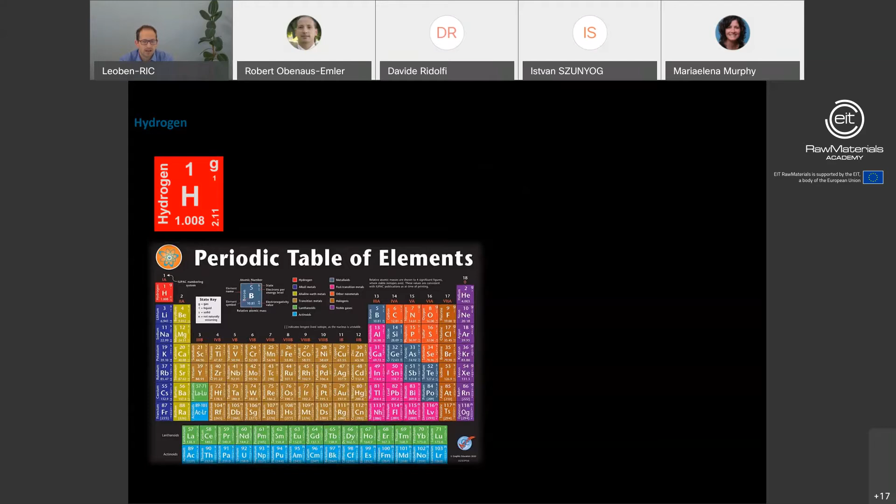I said hydrogen, so let's look at hydrogen first. Hydrogen is one of the elements, of course, and I put the periodic table of elements here on the screen. And hydrogen is there in the top left corner. It is therefore the lightest element that we know. It is the most abundant element in the universe, so almost everything is made of hydrogen. Only a tiny little bit is not hydrogen.

It is the major constituent of our sun, where at the moment around 75% of all the mass in the sun is hydrogen. The rest has been converted to helium by fusion, and that's also a really cool process because it produces energy, and this energy we can see as light. And that's the main reason why we're here today, why you are online and I'm online, and why we all live as animals and human beings here on the Earth.

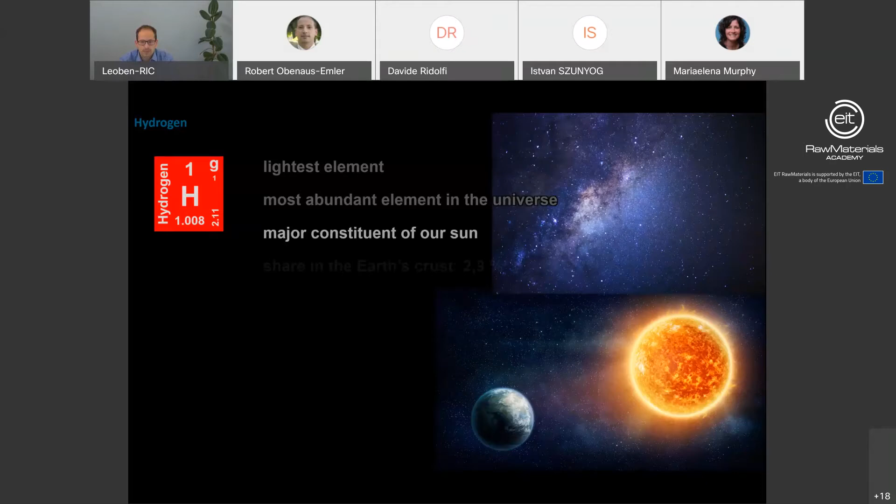So on the Earth hydrogen is also available, but mainly in the crust only. And here an overall share of around 2.9% can be attributed to hydrogen. Here on the Earth, in the crust, we have it found mostly in compounds. So not in its pure form, just in compounds. And the most well-known is, of course, water.

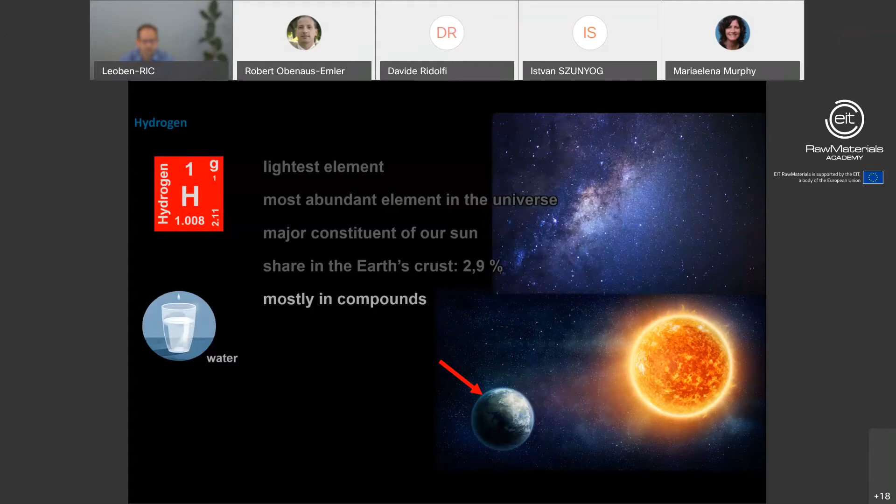You all know that. There's water everywhere around you, probably. You're drinking it, I'm drinking it. There's also seawater, so a lot of hydrogen is in water. There are other substances that contain hydrogen, for example, oil and gas, which contain a lot of hydrogen. And then, of course, a lot of hydrogen is also found in various minerals.

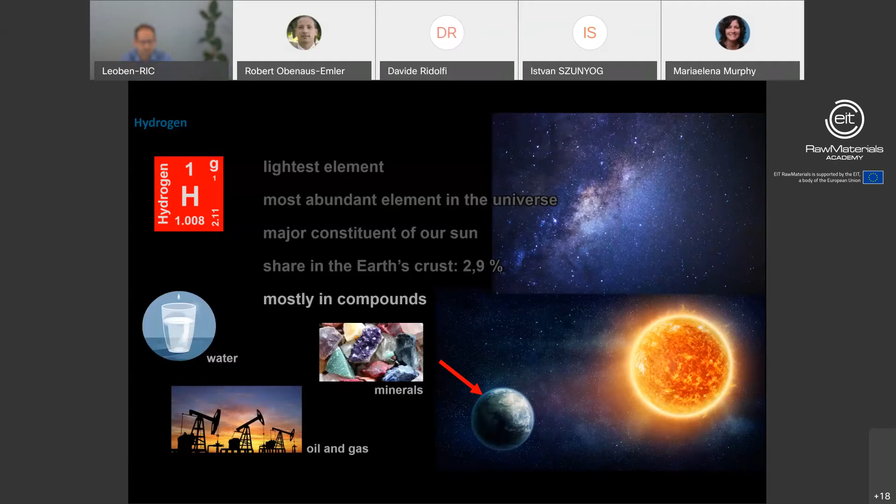So hydrogen is not found in its pure form normally, where it would be a colorless and odorless gas, H2, just two atoms of hydrogen bonded together. But that's actually the one that we are after, because that one is also an energy source, and it has a calorific value of around 33 kilowatt hours per kilogram. So to compare that with, for example, natural gas, this is 3 times as much as natural gas.

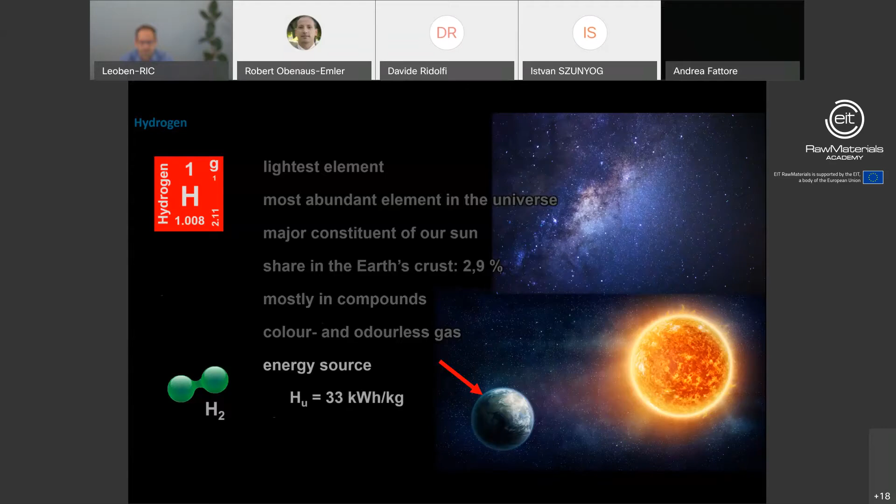So today, we are already using hydrogen, and we're producing it. So I've put here some rough numbers, partly estimated as a projection for the current year 2020. So overall, globally, we produce roughly 120 million tons of hydrogen per year. In the European Union, 12 to 13 million tons. And well, we are from Austria here. So in Austria, roughly 0.15 million tons. That is not much, but it's still significant.

So let's have a look at what we really use it for at the moment. And we use it for these 4 main things. It is the production of fertilizers, so here mainly ammonia. It's hydrotreating of petrol, so to produce the fuels that you need to drive your cars, we need hydrogen. We also use it for the production of methanol and also partly for some metallurgical processes.

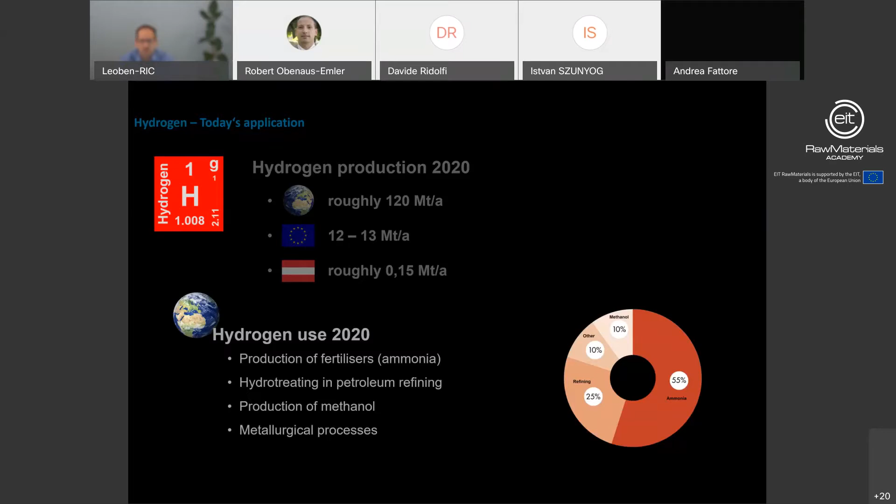As you see here in the bottom right on this graph, most of the hydrogen is used for ammonia. So this is the dark red color. The next biggest part is used for hydrotreating in the petroleum industry, and then a bit for the others. So let's have a look at how we can produce hydrogen.

40% of this overall amount of hydrogen that we produce is actually a byproduct of other industrial processes. And this hydrogen is not available because it's being used there directly within the process. So, for example, it will be converted to energy that fuels basically the process itself.

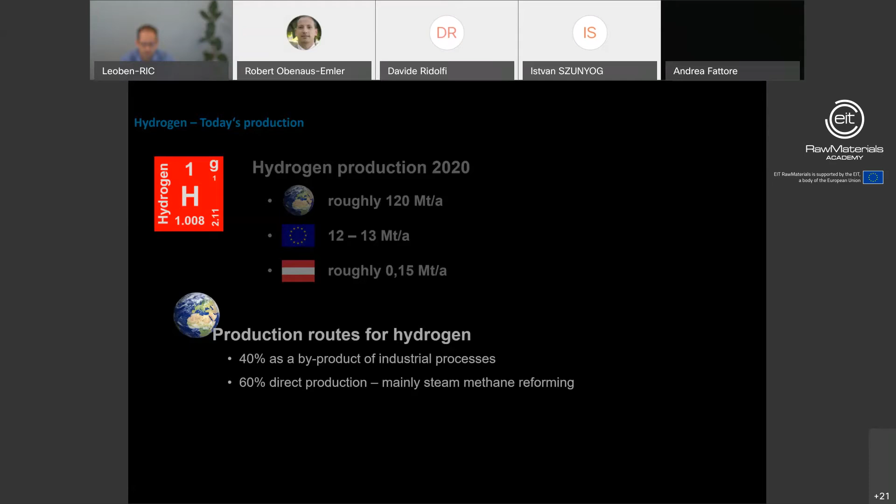The other 60% are the ones that we really directly produce. That's the hydrogen we are after, that we want to use for those applications. And there is a main production process for hydrogen currently, and that is steam methane reforming. And steam methane reforming relies mostly on fossil fuels.

Well, and if you add it up and do the maths, then you will find out that around 12 kilograms of CO2 are emitted for each kilogram of hydrogen that you produce by steam methane reforming.

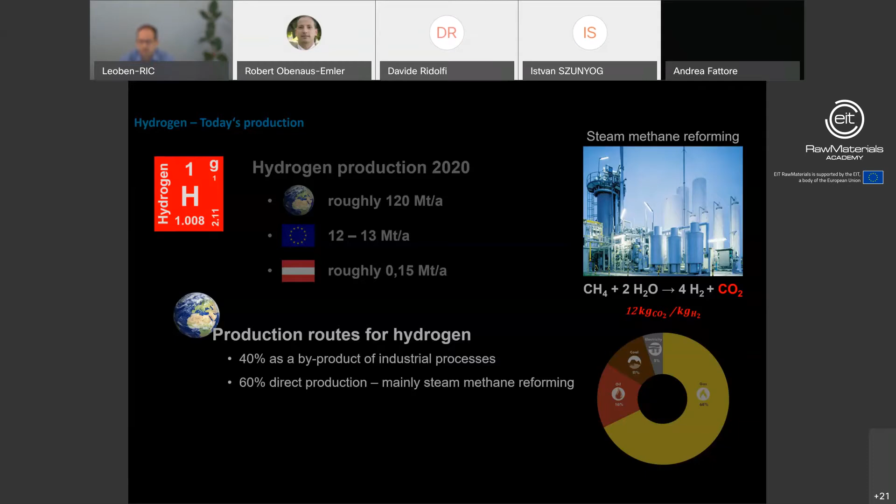So you have heard about hydrogen a lot, I think, and you have picked up that there might be applications here and something to do there. And let's have a look at the hype. Why would it be so important to have hydrogen? What are actually applications that are of interest? Well, I said it's an energy source. So it has a high calorific value, and that, of course, can be used to produce heat and also heat industrial processes, houses, anything you can think of. That would be one major application.

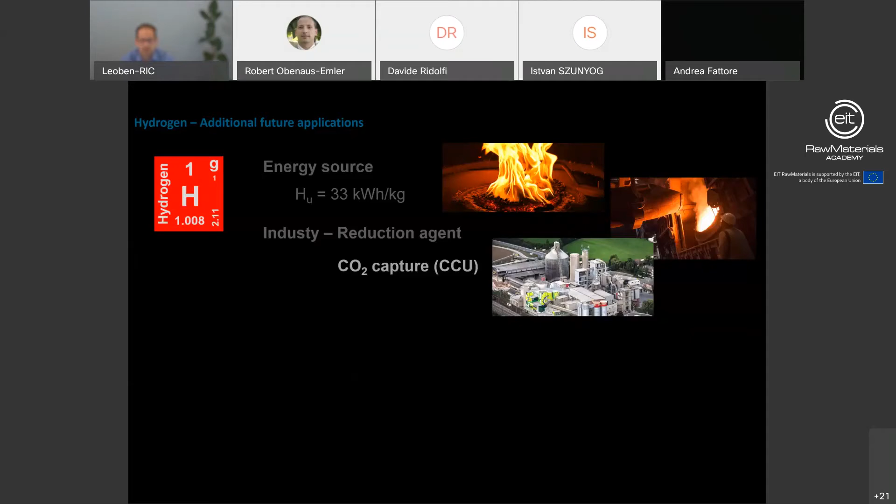Another one would be that you can use it in the industry as a reduction agent to produce steel, for example. Steel is one of the main emitters of CO2 at the moment. You can also use hydrogen to capture CO2 from other processes. Here is an example of a cement plant. So I was talking about capturing CO2, and here's an example of cement.

Cement produces around 1 ton of CO2, maybe a little bit less, per ton of cement. And most of that CO2, more than half of that, is not from fossil fuels. It's not from bringing the energy to the process. It is from the raw material. It is from limestone. And that we can't get rid of, right? Even though we could heat and produce cement without fossil fuels, still the CO2 of the raw material limestone will be emitted. And hydrogen can capture that and produce something cool out of it.

For example, it can make synthetic fuels. And synthetic fuels are something we will still need in the future. Here's an example of an airplane. Airplanes will not be able to fly on battery power or probably not even hydrogen power. They will really need synthetic fuels to still be in operation.

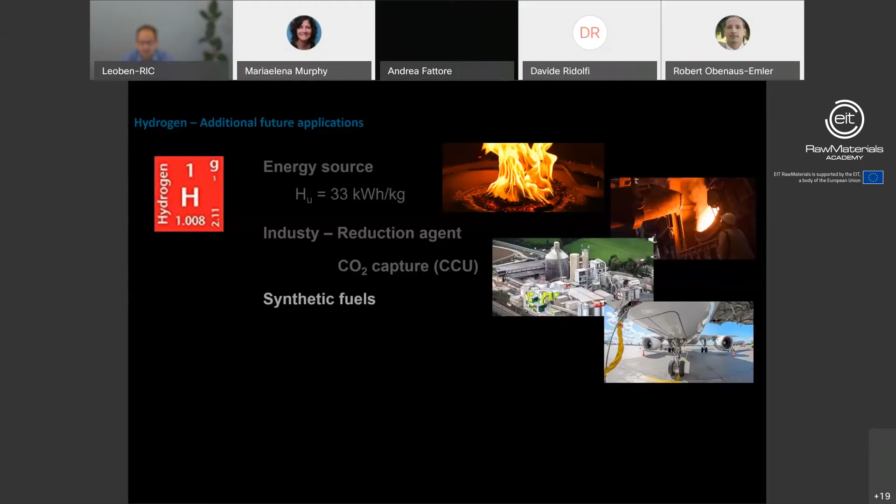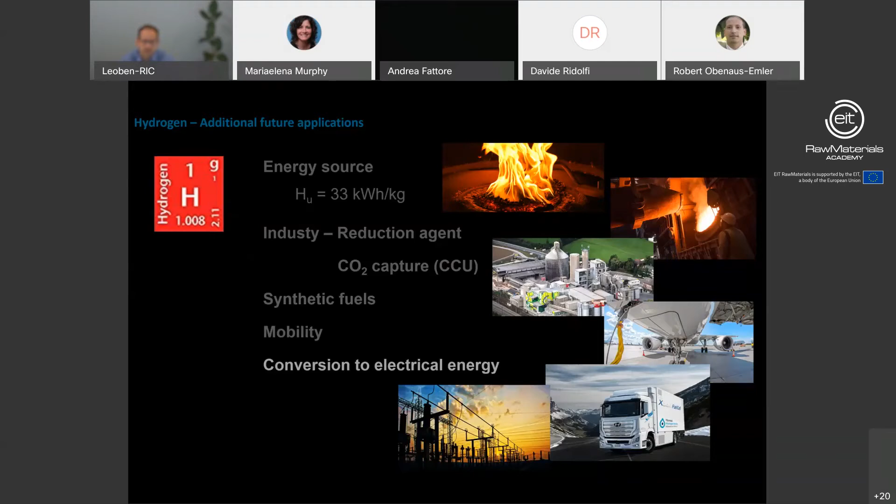I mentioned mobility already, and hydrogen can play a major role in mobility, especially for heavy vehicles, for trucks, and intercontinental traffic of big and heavy loads. Also, hydrogen can be converted back to electrical energy, and that can be used for everything else. So if you use electric energy to produce hydrogen and then convert it back to energy, that will be like the battery for electricity. It will be hydrogen to store electrical energy in another form. So that's a lot of cool applications.

But what will be the demand? A lot of people think about where to use it and what to do with it. And here is a little forecast of how much that could be. So at the moment, this is what we're using, around 8 to 10 exajoules. This is now energy, but that's the amount I mentioned before. It will increase roughly tenfold until 2050. So a lot more hydrogen will be needed. And obviously we cannot produce it by steam methane reforming, because we are really producing a lot of CO2 with it.

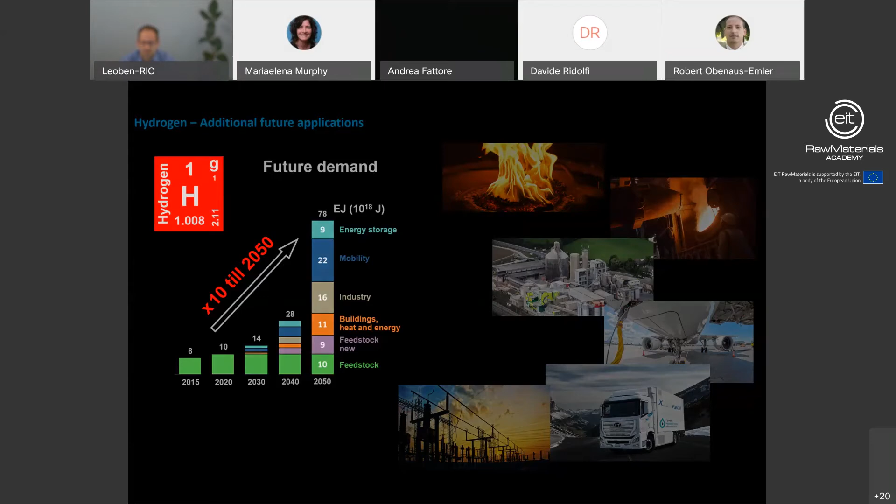So how could we possibly produce it? And I'm sure that you remember from the beginning that hydrogen comes also in the form of water, liquid H2O. And that can be split into its components, hydrogen and oxygen. And actually that process is called electrolysis. I think most of you have seen this somewhere in a school experiment or have done it by themselves. It's pretty simple and it does the job.

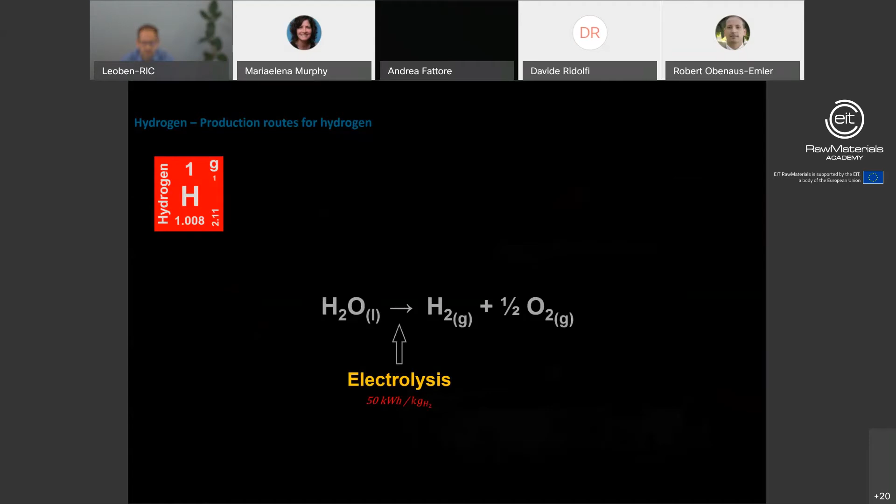However, to do it, because hydrogen in the form of water has such a strong bond, it needs around 50 kilowatt hours per kilogram of hydrogen to produce that reaction or to facilitate that reaction. And depending on where this electrical energy comes from, that can have a major contribution to CO2 emissions. So that could be something around 30 kilograms of CO2 per kilogram of hydrogen if you take the power directly from the next coal power plant.

It could be low if you really go to renewable energy. So that means in the end you need renewable energy for electrolysis, otherwise you will just produce a lot of CO2 again for producing your hydrogen, which is not what we want. But let's have a look here. Well, what can we do? I said it's an energy source.

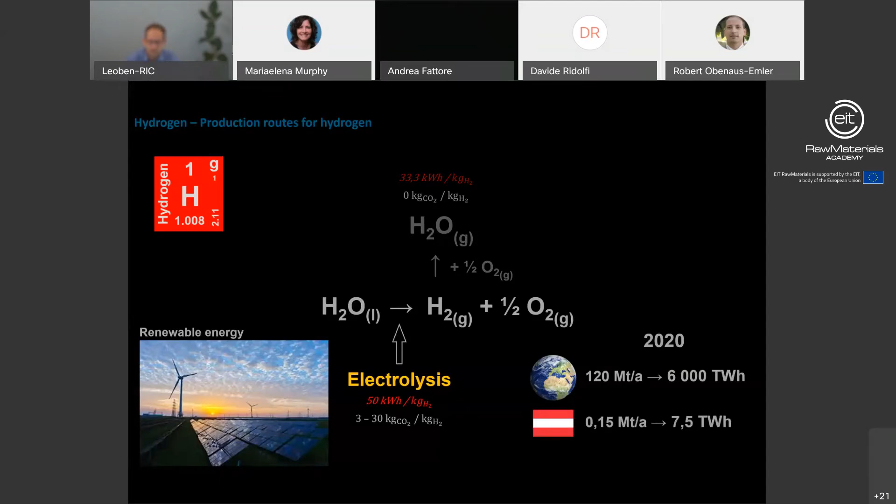We would need actually 75 terawatt hours of electric power to produce the hydrogen. And that would be almost exactly the amount of energy that the whole nation needs right now in a year, without producing almost any hydrogen by electrolysis.

Anyway, that means we would need so much more renewable energy installed until 2050 so that we can double our energy consumption. And that's quite a lot of energy that we need, and that's quite a lot of money and quite a lot of infrastructure. And the question is, is that possible to do? Well, I don't have the answer right now. We can come back in 30 years and check.

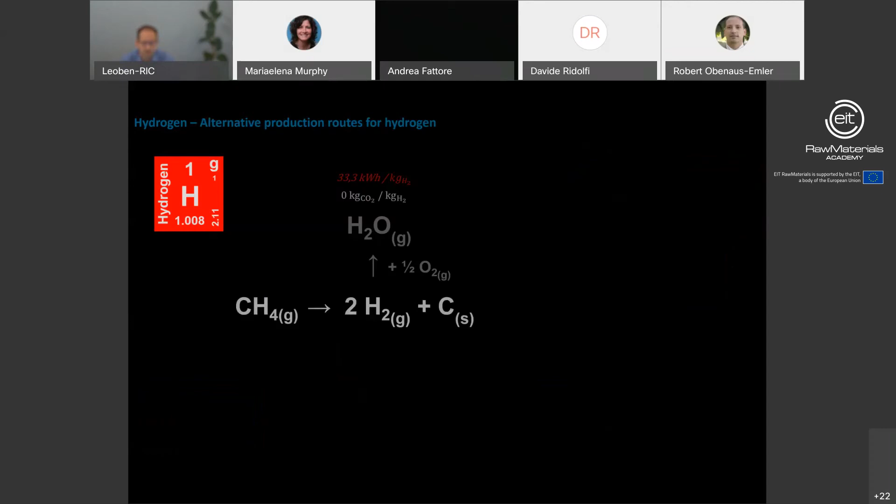But is there anything else that we could do? Is there another source? Well, if you remember from the beginning, it was water, and then we had also the fossil fuels. And if you just look at methane, CH4, so natural gas, then you could actually also convert natural gas into hydrogen and carbon. This process is called pyrolysis. And it only needs around 1/4 of the energy per kilogram of hydrogen than the electrolysis. So that's a big benefit.

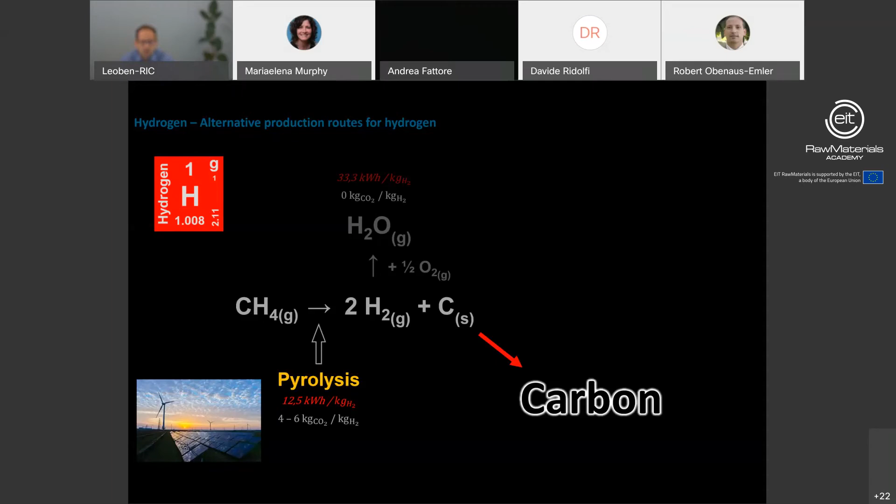Also, again, if you use renewable energies for that, you will end up roughly with 4 to 6 kilograms of CO2 for each kilogram of hydrogen that you produce. And additionally, you get carbon, solid carbon, no CO2, nothing like that, solid carbon. And solid carbon is also a very important element that we need already now a lot for batteries, for example, and other things, but also for many more applications possible for the future. And so I think we better look at that now.

But before, let's check the figures again. If we produce 120 million tons of hydrogen a year, and we would do this only by pyrolysis from methane, we would end up with around 360 million tons of carbon. Well, that's quite a bit, and we will see in a bit that this is a lot.

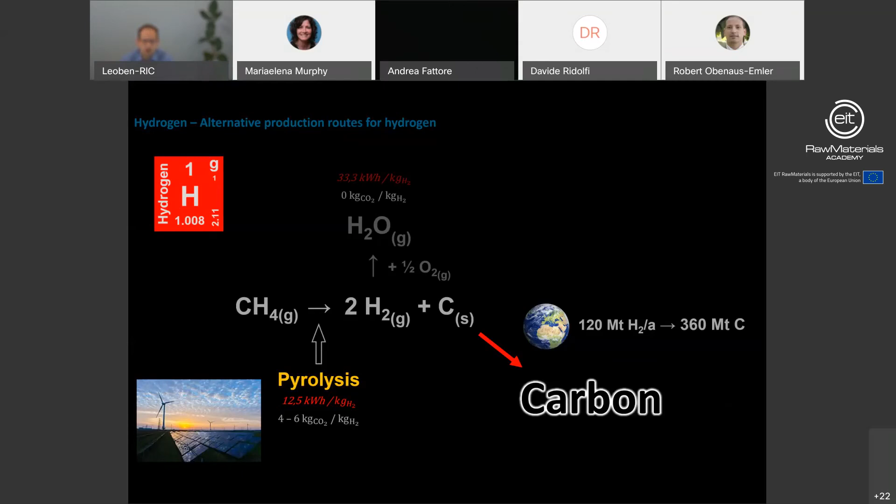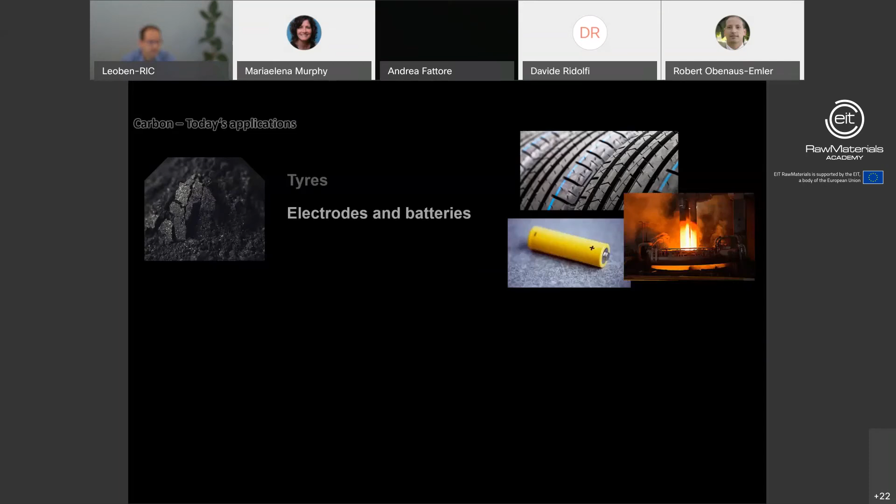So to compare it, let's have a look at what carbon is used for today. So here's a picture of graphite, which is also called the black gold. And it's got some applications, of course, already that you all are familiar with, or most of them, I think. Well, if you drive a car, your car has tires, and tires need carbon. Also, other rubber products need carbon, of course. It's used in electrodes and batteries. So to produce steel in an electric steel plant, you need electrodes that are made of graphite. You need graphite for the batteries, also for your electrical cars if you have any.

Then we need it a lot in refractories. And refractories you need to make almost everything that you see around you. Every metal that needs to be molten, everything that needs to be heated to high temperatures needs refractories in order to make it possible to be produced. And most of those refractories also include at least some content of carbon.

Another cool thing is graphene. Graphene is just one layer of graphite. So graphite has this layered structure, as you can see here in the picture, but many of them on top of one another. And graphene is just one layer. So it's a two-dimensional material that has the highest strength that we know, that has a lot of other cool properties. And unfortunately, at the moment, it's not available to great extent, but it has a high potential because it can be, for example, used in electronics. It can be used in all kinds of building materials, probably, and many, many applications more. We already do this, but only to a small extent.

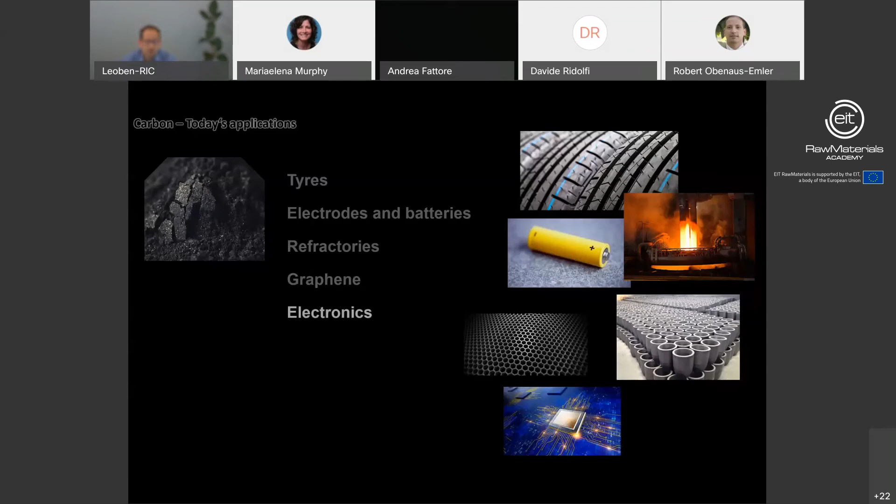So what's the world market of carbon today? Well, it is around 15 million tons. So compared to the 360 million tons that we would produce, that means we are done after like 2 weeks of the year with producing our carbon for the rest of the year. That means, of course, we need to look further. We need to look for other applications.

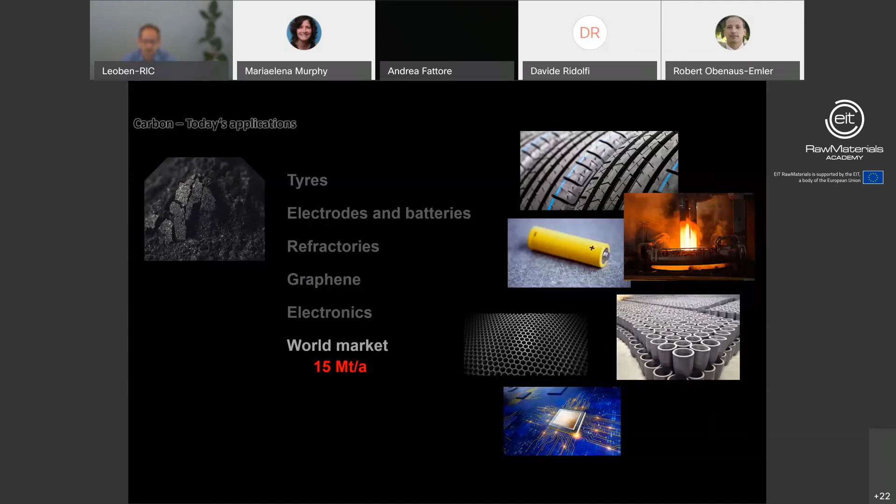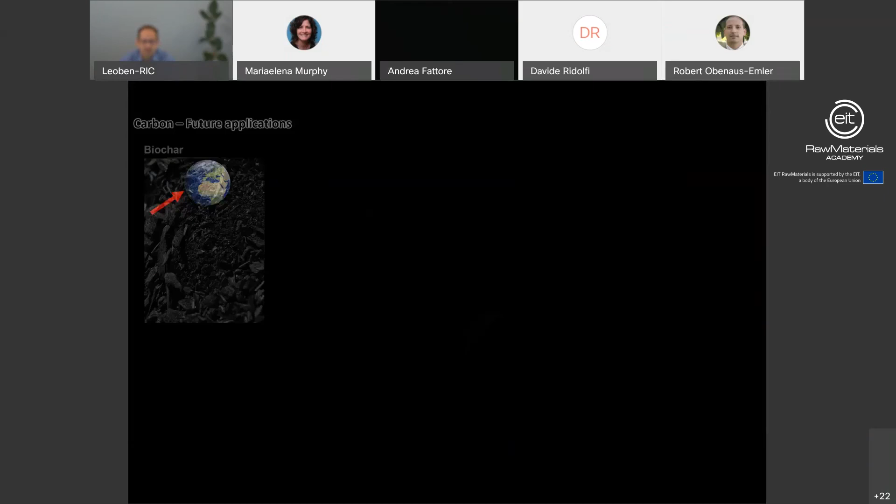And in order to do so, we need to relocate ourselves a little bit back in time, maybe 2,000 years, and also a bit on the other side of the globe, into the Amazon Delta. And there is something really cool that you can find there, and that's Terra Preta, which is a soil that has been engineered by the people that live there. And that Terra Preta contains biochar, which is just a pyrolysis product, remaining carbon from biomass.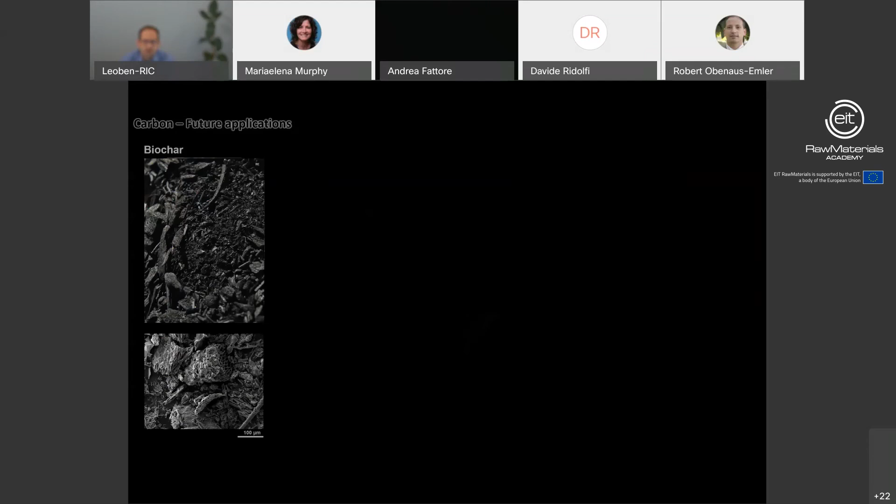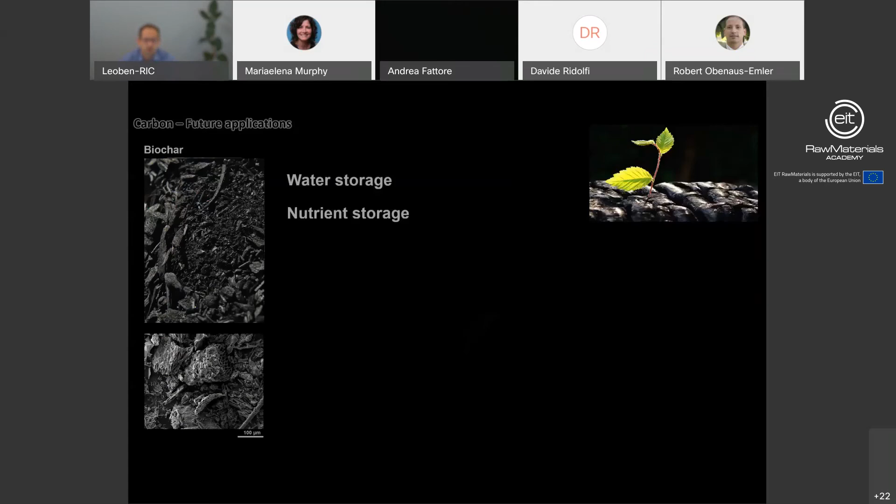And if you look closer at this, here is an enlarged micrograph picture that shows you the structure. You see a honeycomb kind of structure in there. That has really cool properties because it can store really efficiently the water and nutrients that the plants later on need, and it can distribute this water and nutrients to the plants whenever they need it, so the soils don't dry out.

Also, this structure is a perfect habitat for microorganisms, which in return helps you to generate more humus in your soil. And on this picture there, you see a man standing on a topsoil layer, and this topsoil layer is darkish to around the depth of 1 meter. Underneath it, it's rather brownish. That soil was made around 2,000 years ago by just adding biochar into the soil that was available there, and it is still there, and it is a really fertile soil that helps people grow all the crops and food that they need there.

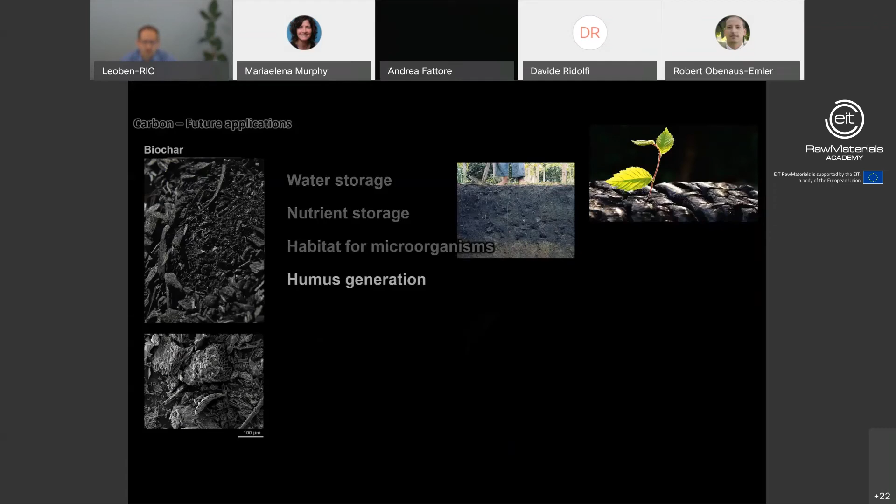You can also use it as an animal feed. It will help your animals to stay healthy, and it will be really beneficial also for the living of the animals themselves. You can use it also as an additive to composting to reduce the emissions of the composting itself, so reduce CH4 and nitrogen emissions of the composting.

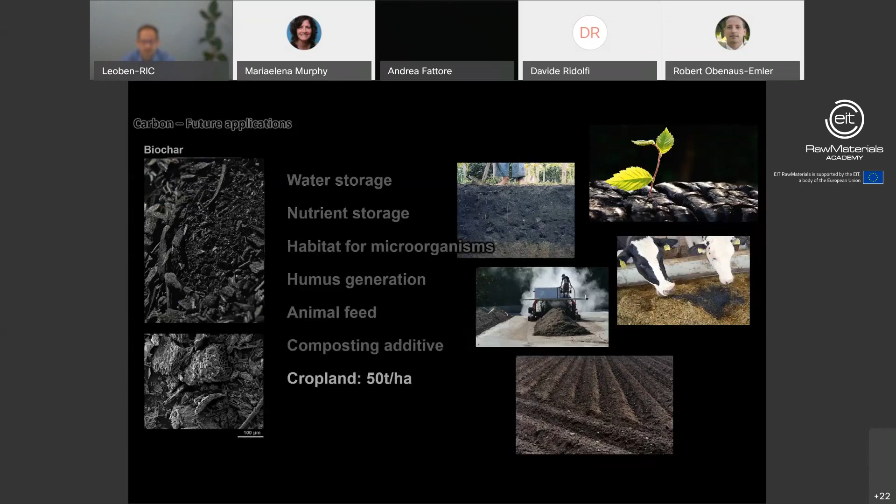You can also put it in cropland, and really in quite a high amount. You can use like 50 tons per hectare, and it will just increase the amount of crops and food that you produce. And it will stay there, and it helps you to keep water and nutrition there for your plants, so that they can use it whenever they really need that stuff to grow.

There's one problem: if you use biochar as it's produced right now, then it's quite expensive. So if you're lucky, you get it for €1,000 per ton, or even €1,500 per ton, but that's quite expensive. Not one farmer can afford to put even 1 ton on 1 hectare of cropland.

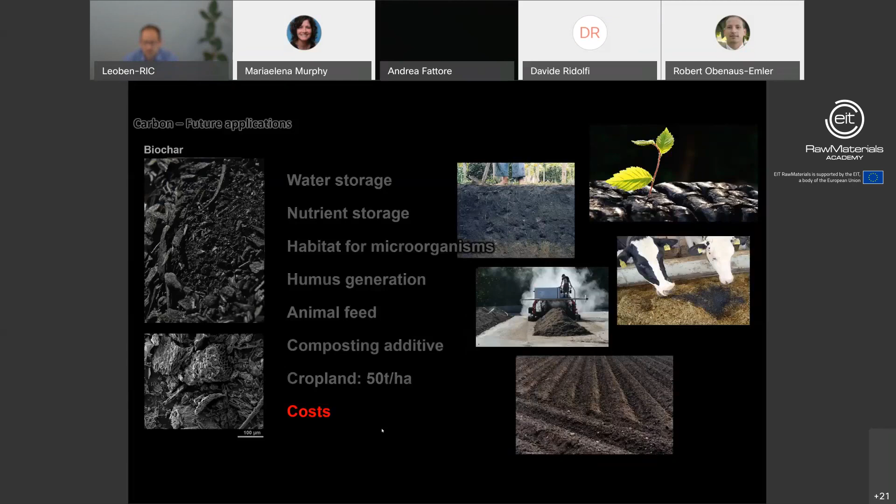Well, there is a solution, and that is due to the carbon that we produce from the pyrolysis. Here's a micrograph of that. It is looking different, but again, similar to the biochar picture, you see a really high surface area, and that surface area is the crucial property. Additionally, we are looking here at the university at different pyrolysis technologies that try to tinker with the properties of that carbon product, so that in the end it will be able to be used for all of these applications, or even more applications that I didn't show you today.

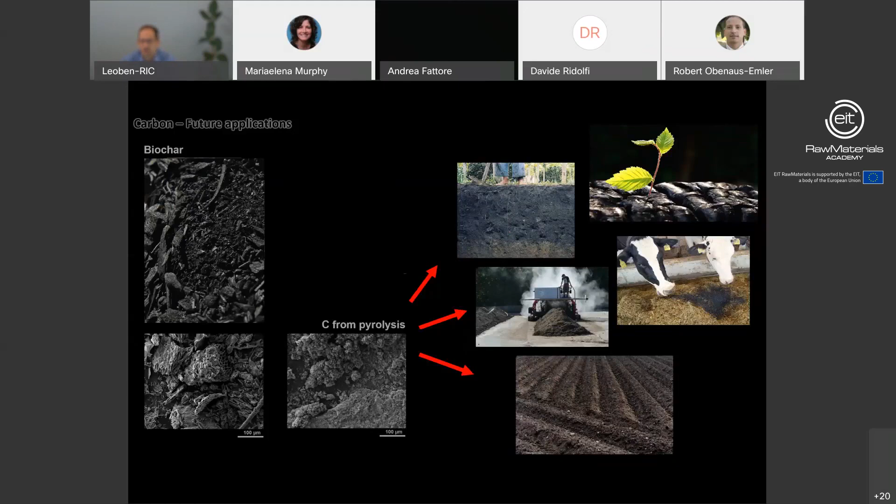So in the end, that is a big benefit of pyrolysis, not only being able to supply hydrogen to a good extent with low energy demand compared to electrolysis, but also additionally have carbon as a potential resource for really cool applications. A Chinese proverb says, when you drink water, think of the source. I hope after what I showed you today, the next time you use hydrogen, you might think of the source.